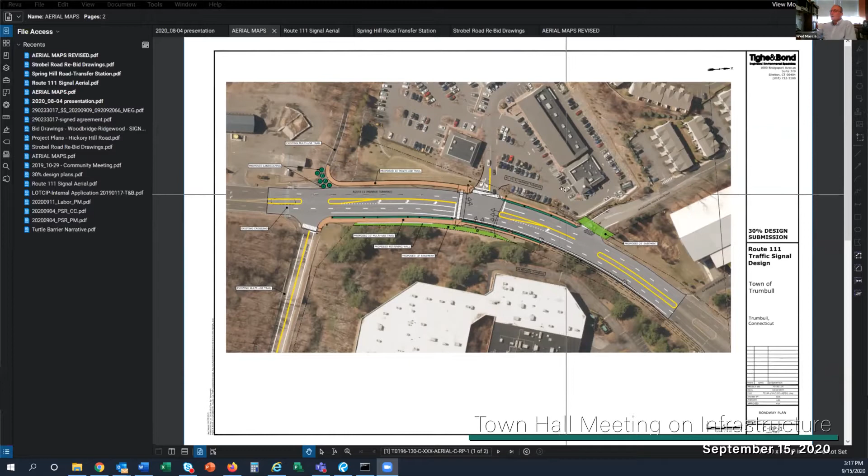Temporarily, last winter and early spring, we upgraded the existing crossing for Old Mine Road for the trail. That was put in with what is called a rapid flashing beacon signal, and that was a town project funded by the town. As part of this project, the DOT will help pay to decommission that, basically pay to remove that equipment. What we're going to do, I'm not sure if it's on this drawing set, is relocate that over to the trail crossing at Spring Hill Road.

The trail crossing on Spring Hill Road is a little bit south of the transfer station, right at the driveway to the bus terminal, the school bus terminal. As part of that, we're going to move the trail, because right now when you come up the trail, you cross Spring Hill Road, and the trail shares the driveway with the buses for about 150 feet. Then it veers off and continues on its own. This project will relocate that a little bit to the west or south, depending which way you look at the map, so that it's not shared with the bus driveway.

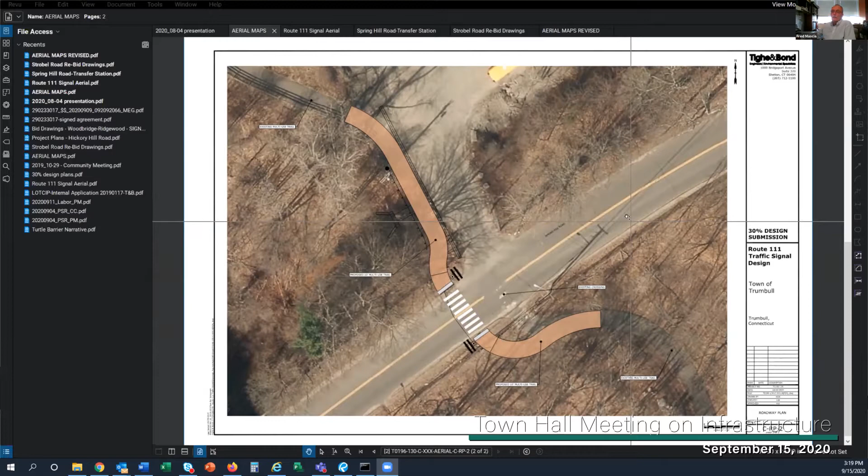What we'll do is take some of the equipment that was recently installed at the existing crossing and relocate it to this location. Not part of this project, but another project the town is doing, is actually improving access to the transfer station. To get everybody oriented, the transfer station is this location here, the bus terminal, and the existing trail for Spring Hill Road is here. What we're doing as a separate project is improving the traffic access into the transfer station.

We know on Saturdays in the spring and fall, when people are doing a lot of yard cleanup, traffic is horrendous there. There's a queuing issue where people can't get into the transfer station, blocking Spring Hill Road. So what this project will do is create a turning lane into the transfer station through traffic on Spring Hill Road. If anybody comes down Treefold Drive to go to the transfer station, there'll be a queuing lane off Spring Hill Road to go into the transfer station, providing throughway traffic on Spring Hill Road at all the peak times when the transfer station sees heavy users from the residents.

Thank you, Fred. That's pretty much the Spring Hill and Route 111 trail signal projects.

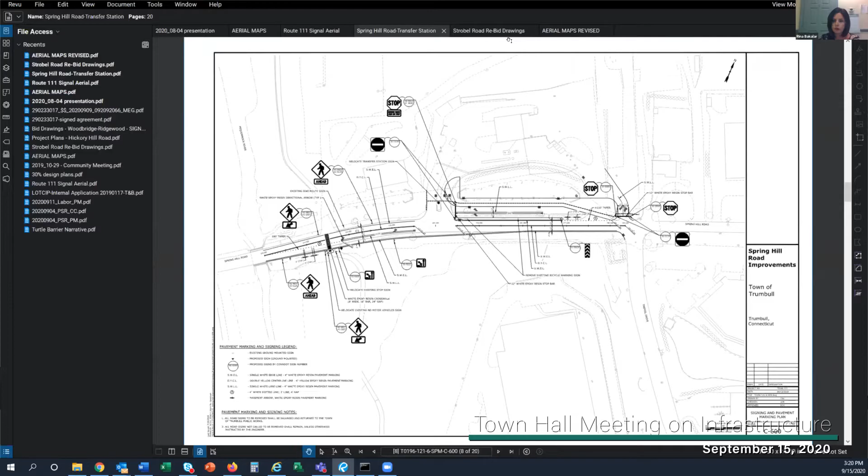Are there any other staff comments regarding these projects before we move on to Long Hill Green? I think we can move on to Long Hill Green at this moment.

Some of the folks tuning in might remember that we did a Long Hill Green village improvement plan that was adopted in 2018. That plan is really a vision for how to enhance the quality of life and the economic vitality of Long Hill Green, and it prioritized a number of projects. What we say a lot in meetings and internally is this is not just a plan on a shelf. We're using it as a roadmap to apply for funding and to implement projects to improve that area.

Gary Sorge is with Stantec and Bill Maurer, again our town engineer, have been part of the team. We have a monthly meeting of this team, and Gary's going to review some of the projects that actually were completed and some of the projects that are in design and or under construction. So I'll turn it over to you and Bill now.

Okay, thank you all. I just want to confirm that folks can see the Long Hill Green slide. No? Okay, bear with me a second.

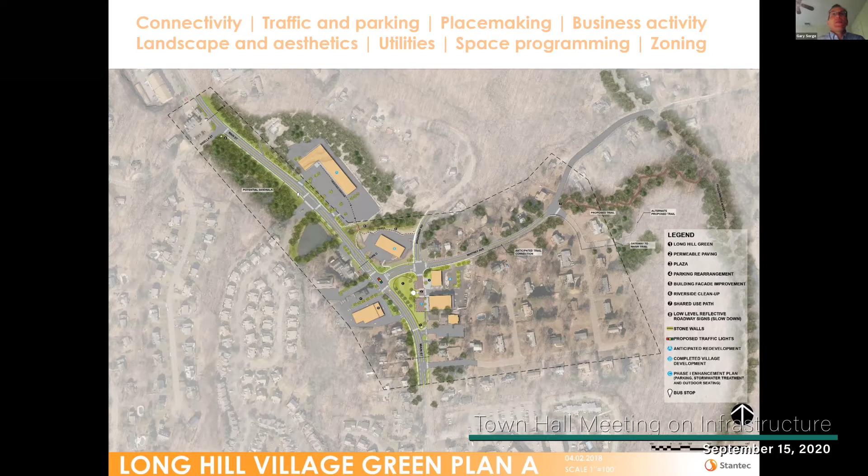Thank you, Rina, for the introduction. As you recall, Rina mentioned back in 2018 the town adopted a Long Hill Village Green Plan. From that plan, a number of key topics were identified: connectivity, traffic and parking, placemaking, and improving business activity within the area, landscape and aesthetics, and looking at utilities, space programming, and zoning. But what we're going to talk about today primarily is traffic and parking, placemaking, and very importantly, connectivity.

A couple of projects are underway and some have been completed. The Broadway South Stormwater Quality and Parking Enhancements was completed in construction back in 2019. This is the area right in front of Franco Gianni's restaurant. As part of the Long Hill Green Plan, distinctive pavement was placed between the buildings, the restaurants, and the existing green to improve stormwater.

This is a 319 grant that the town was successful in acquiring. It basically takes existing asphalt pavement out and puts in a pervious surface, which allows water to infiltrate and penetrate into the ground, improving water quality within the Pequonnock River watershed.

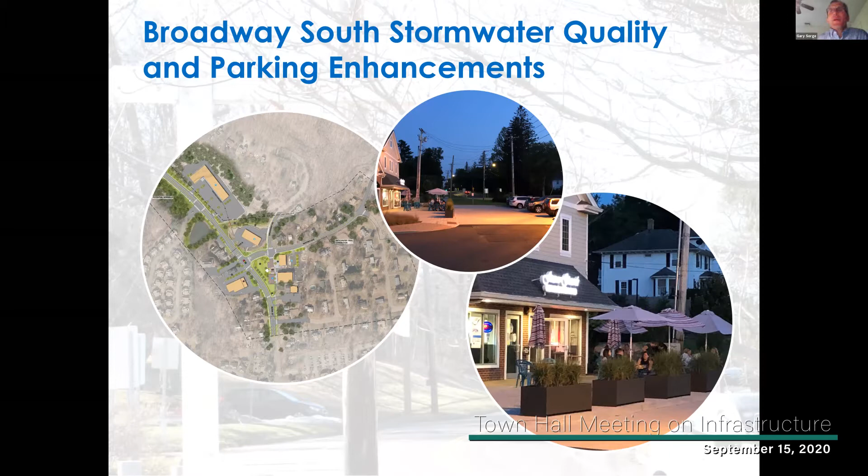And now that we have these extended sidewalks and patios, you have outdoor dining, couldn't be more timely in this period of COVID for the local businesses. And with that, we had parking enhancements as well, so people are enjoying this as we speak.

Ongoing projects include the Main Street sidewalks, the Main Street and Whitney Avenue traffic signal, and the Whitney Avenue sidewalk connection to the PRT. There's a phase 1 portion and a phase 2 portion. Phase 1 is currently underway. So we'll go through these individually.

As you see the three bars on top, red, yellow, and green, these will indicate where the projects are within the Long Hill area. The roadway running east-west, left to right across your image is Main Street. To the right, going up to the top right-hand corner, is Whitney Avenue. So the Main Street sidewalks essentially follow the red outline here.

They'll run from Gisela Road all the way up to the intersection of Whitney and Main, and also on the east side of the street from the northern limit of the former Marissa site back up to the Whitney and Main intersection. We'll cut back Whitney Avenue and hook up with Broadway. So what you're seeing here in red generally outlines the location of the Main Street sidewalks.

In yellow, you're seeing the area that will comprise the traffic signal improvements at Main Street and Whitney Avenue. Now, the town has already completed the right-hand turn lane on Whitney Avenue, which is essentially a precursor to having a signal placed here. And the traffic improvements, you're already seeing the benefits of that right-hand turn lane, which has already been installed.

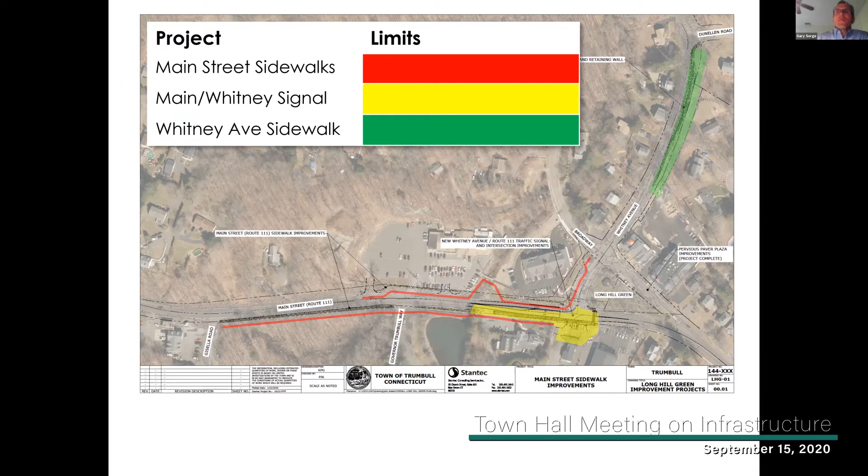So the Main Street sidewalks are being funded by a Connecticut DOT Community Connectivity Grant. Again, the town was successful in applying for that grant. Final design review is complete by Connecticut DOT. Flood management certification is pending, and we expect that to be complete very shortly. Property easement and acquisition is underway by the town. Construction is anticipated to begin in spring of 2021, and the estimated cost of this project is roughly $310,000.

So this will include the sidewalks on Main Street that we had shown, outlined in red on the previous exhibit. Here they're shown in green, just to confuse you. So it brings you from Gisela up to Whitney Avenue, and then you see that sort of zigzagging pattern on the east side of Main Street.

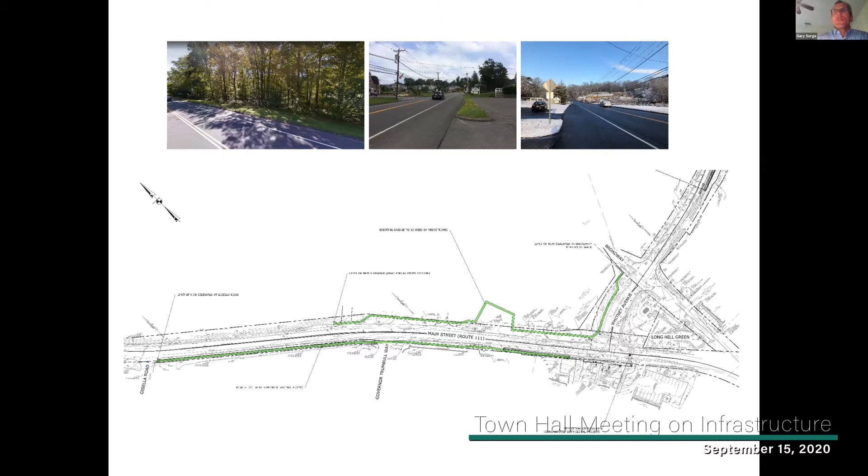So the connectivity that was discussed in the Long Hill Green Plan is certainly being addressed here. This will connect many residents and businesses to Long Hill Green, and these were noted as priorities during the preparation of that plan. The photos along the top, residents of Trumbull are very familiar with—these are just sections of the roadway along Main Street where the sidewalk will be installed.

So we also have the Whitney Avenue and Main Street traffic signal. Final design review is complete. Connecticut DOT traffic review is underway. The property easement and acquisition involved here at the signal is currently underway, and that's being led by the town. Construction of the signal is also anticipated in the spring of 2021. The estimated cost of this work is about $535,000.

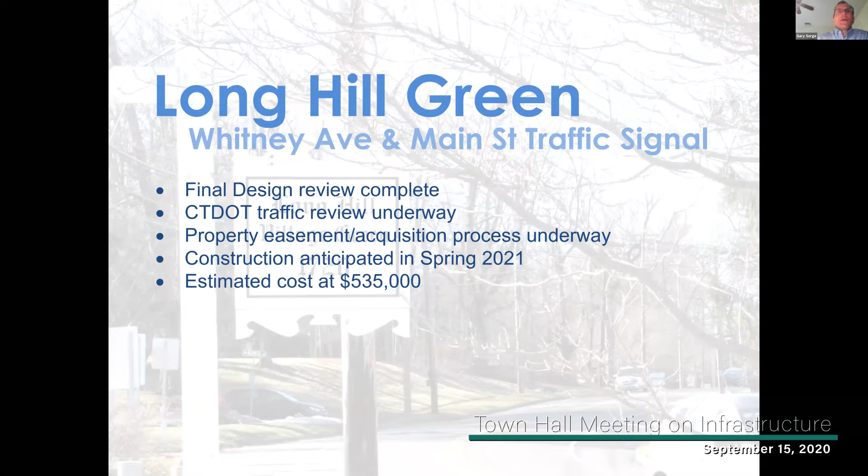You'll have a crosswalk at this signal. It is located on this side based on direction we received from the police department. Perhaps in the future it becomes a full 3-part crosswalk, but initially it'll be a 2-part crosswalk, crossing Whitney Avenue and also crossing Main Street.

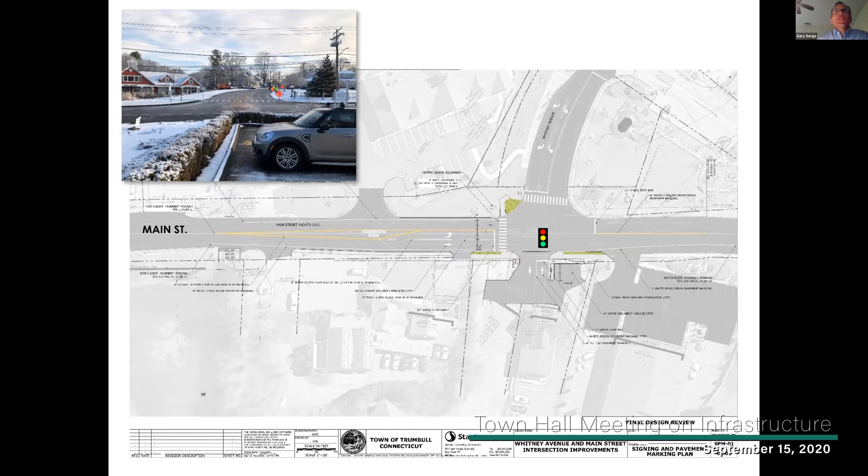And again, you can see on the top, Whitney Avenue coming into Main Street, the right-hand turn lane that's already been constructed. And the photo on the top left is looking from the nearby property across Main Street to Whitney Avenue. So from this location, you will see the signal heads when they are installed in 2021.

Then we have the Whitney Avenue sidewalk. So the phase 1 bids were received in July of 2020. They were favorable. The town is commencing construction this month. There might be work that you've seen already underway, and construction will be complete within 100 calendar days.

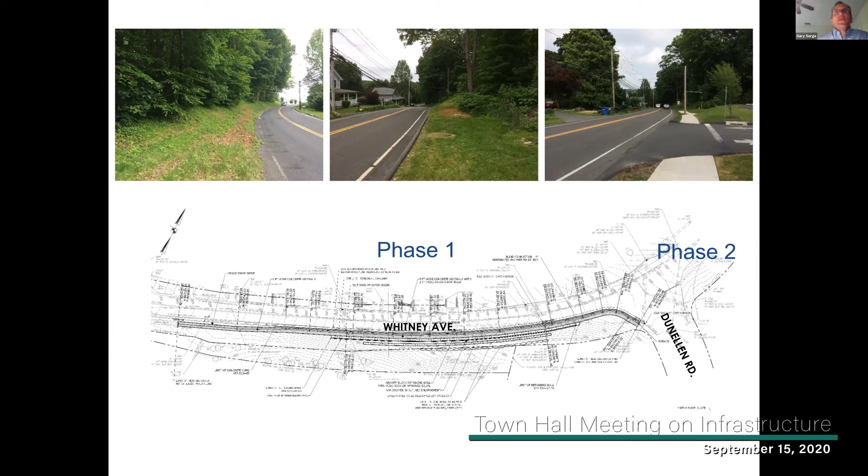The photo in the center is looking from the top, from Long Hill Green, essentially at the end of the sidewalk, down looking east on Whitney Avenue. And then the photo to the top right is the driveway that connects into the development, leading off to the right. And the lower image is an engineered plan. It shows the extent of the sidewalk from Long Hill Green down to Dunellen, and it's showing that we have terraces. I know it's an engineered drawing, but the next illustration will help.

We need to terrace the terrain here to allow the sidewalk to be constructed, so we'll have safer conditions for pedestrians. We'll have means to remove snow from the sidewalk and store it on the upper slope. And with the loss of trees and tree removals that are going to be required to do this, with the trees overhanging the roadway, we'll create a terrace landscape that will allow the town and the contractor to replace vegetation, which will mature over time and create a very beautiful setting for Whitney Avenue.

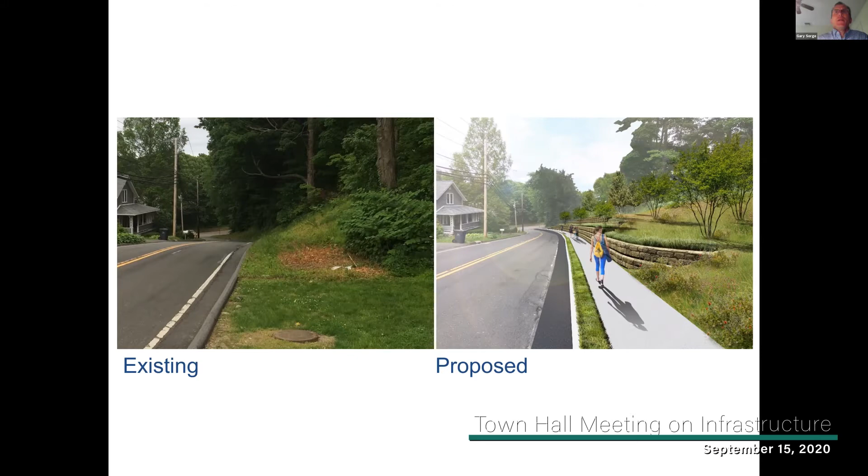So what you're seeing on the left is the existing condition, and the rendering on the right shows the proposed condition shortly after construction is complete. And that concludes the Long Hill Green update. So, back to Rena.

Just one note on the sidewalk that's under construction now going down Dunellen. For folks watching, please check our website for updates on that construction. We'll be communicating any lane closures coming up. I know our town engineering department is very good at getting those out, so stay tuned. That portion of the project is funded through a Main Street improvement grant through the Connecticut Department of Housing.

I'm going to turn the program now over to Bill Maurer, our town engineer, who's going to talk about both the Strobel Road project and where that stands, and also the trail connection through Trumbull Center on White Plains Road. So it's all yours, Bill.

Thank you, Rina. Strobel Road, as we're just past a year into this project, is actually way ahead of schedule based on the anticipated completion date, which would have been better than 2 years. We expect to be finished paving by the end of the paving season this year. Currently, most of the utilities have been relocated. We have another section of roadway that has to be lowered. In the next week, they'll be starting to reclaim sections of the last, 2 of the last 3 sections that have to be reclaimed. It's actually way ahead of schedule. It's surprising how the schedule worked out because of the pandemic, and the school closure had actually helped this project move along a little faster.

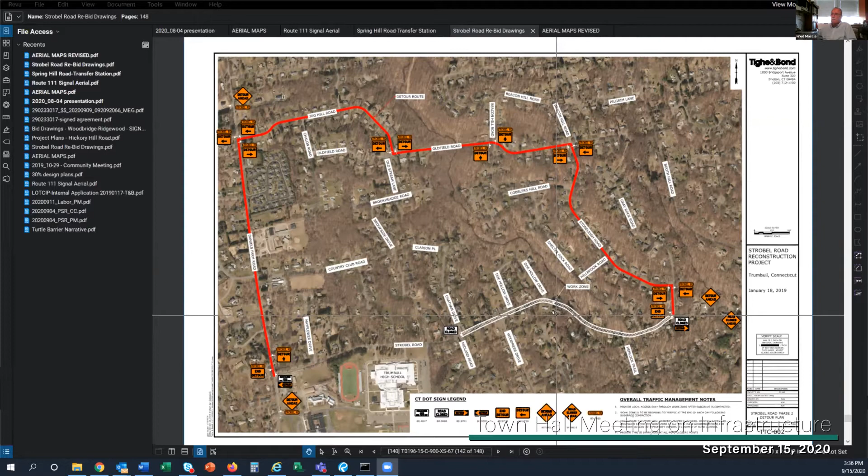I'm going to switch to the next sheet, the middle section of the road, which includes the large box culvert. If anybody drives through there, the culvert is in place. We had a temporary signal over the summer for about a month while they were doing the culvert work to allow alternating traffic. The culvert is in place, and they're still doing cleanup work on the head walls, but the road's open to 2-way traffic after hours and on weekends, so there's no more obstruction. There's a couple sections here where we're cutting the road grade a couple feet to improve the geometry, and that work will be going on next week and for the next couple weeks.

The third stage of the road is from Stoneleigh to Booth Hill Road. This road has the binder course of pavement down; the second course will come down later. Probably once they get the binder course on the middle section, then they'll do final course on stage 2 and 3. There still will be some detours, but minor ones when the contractor's doing the reclaiming or paving.

The project's been, like Bill said, pretty much on track and way ahead of schedule. The contractor has been very responsive to any issues that have popped up. All the utilities are relocated. There's quite a bit of work involved in this project, just so the public knows that it was many years in the making, and the final product is a $6 million roadway reconstruction project. There's been some interruptions of travel through there, but they've been minimized, and I think this has worked out very well for the town — much needed roadway improvement for the town of Trumbull.

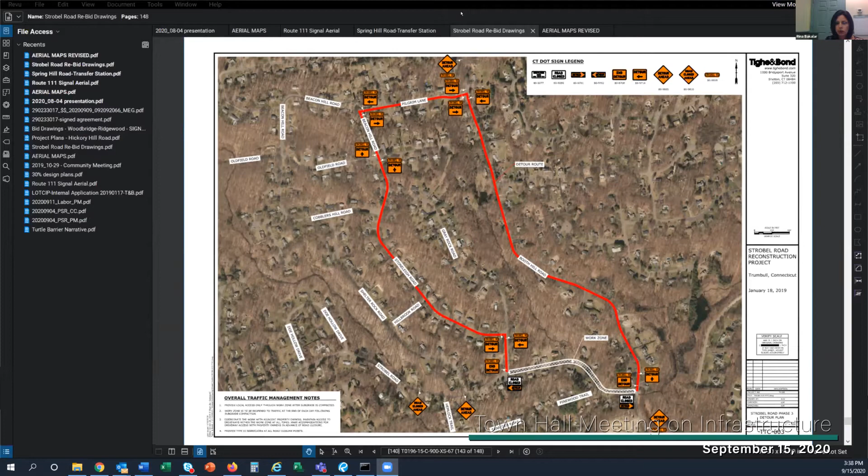I want to mention that our teams met to discuss the interrelationship of these projects and how they impact traffic and detours, so that kind of planning is being considered. I also want to thank Matt Folda, Executive Director of MetroCog, for helping us identify funding for many of the projects you're hearing about, particularly the roadway projects. Bill, it's back to you for the Trumbull Center Trail connection.

If you've gone through Trumbull Center... one second, let me also say that Chestnut Hill Road and Moose Hill Road were also funded through MetroCog. We don't want to forget those two roads, which have been completed, and hopefully we'll get Spring Hill Road also in there.

So thank you. Yes, the Trumbull Center trail connection - as you drive through Trumbull Center right now, you'll see a bunch of cones up. Progress is being made, actually pretty good. It's due to be complete just past Thanksgiving sometime.

They expect they'll be starting work next week in the section at the island of Daniels Farm Road. There needs to be a crosswalk change and a crossing light put in. They've agreed to wait until the end of the project as long as they can, until they actually go through the parking lot at the trail. That's going to be somewhat of a disruption of the trail, but they'll use sections of it at a time so the trail still becomes functional. There may be more limited parking than normal, but we need to make that transition as quick as possible.